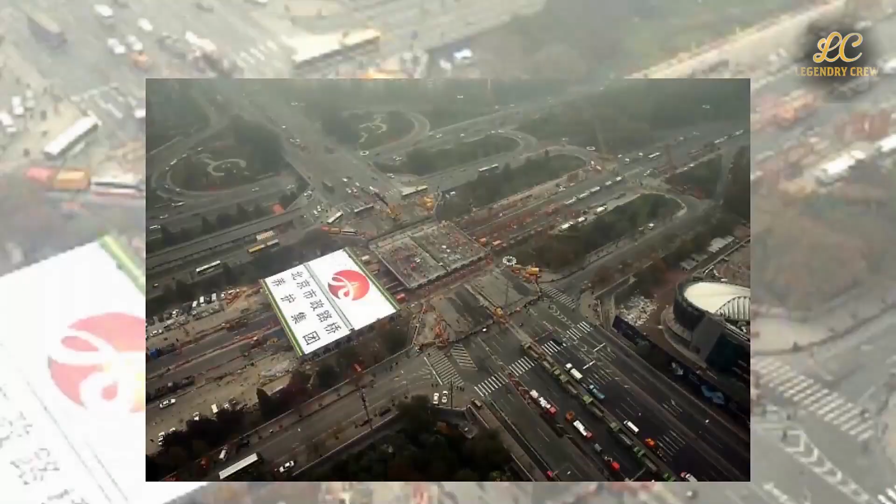In Beijing, a highway bridge that carried more than 200,000 vehicles a day was replaced in roughly 43 hours. That number is not a metaphor. Traffic was diverted. The old structure was cut into 27 prefabricated segments, the heaviest weighing about 139 tons, and a new bridge weighing roughly 1,300 tons was rolled into place on multi-axle transporters and aligned to millimeter tolerances. By Monday morning, commuters were back on schedule.

The viral takeaway is speed. The harder question is why that speed is possible, and what it actually proves.

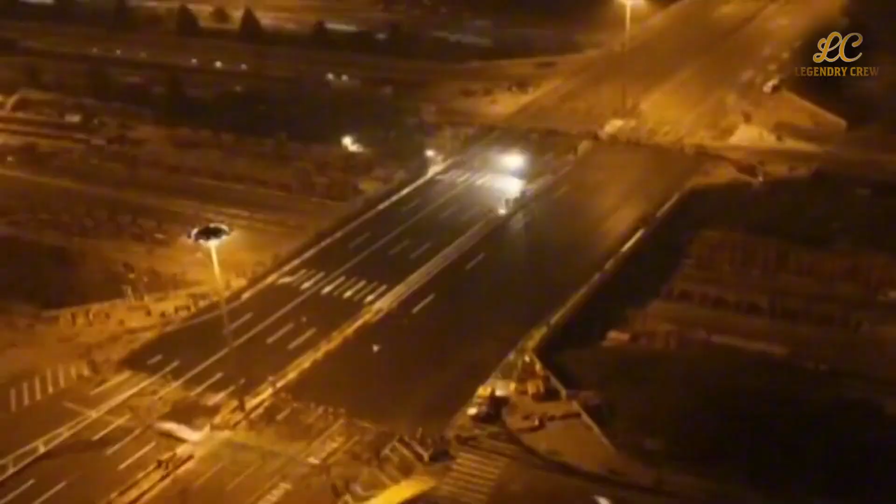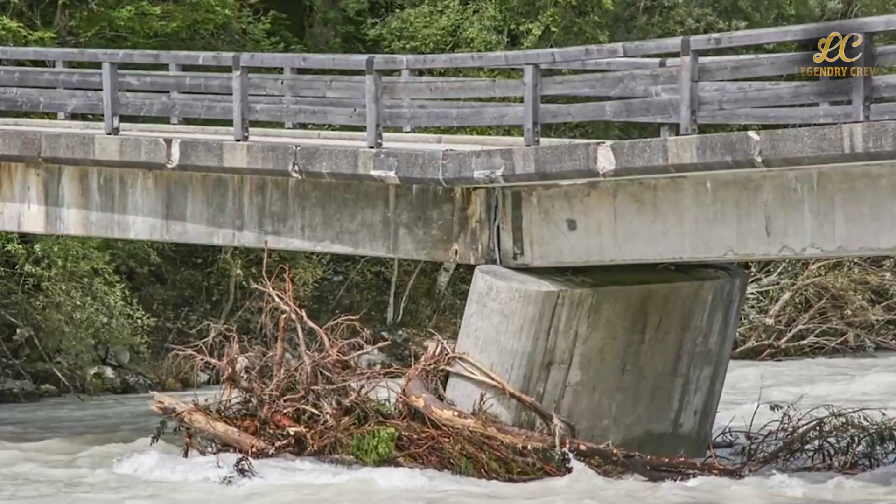Start with the obvious explanation that gets skipped in most videos: China spends far more on infrastructure than the United States, and it has done so for years. Independent estimates put annual infrastructure investment at roughly 6 to 8% of gross domestic product through much of the last decade. In the United States, public infrastructure spending has hovered closer to 2%. When you fund more projects, you also fund the factories, the crews, the transporters, and the learning curve that turns one impressive replacement into a repeatable playbook. Speed is not magic. It is capitalization.

There is also the matter of standards. The SanYuan Bridge replacement was not a bespoke art project. It was modular. Prefabrication meant the work happened off-site, under controlled conditions, while traffic kept moving. When the window opened, crews executed a choreography they had rehearsed before. The equipment was owned or reserved in advance. The tolerances were known, and the authority to shut lanes and move freight did not require years of public hearings.

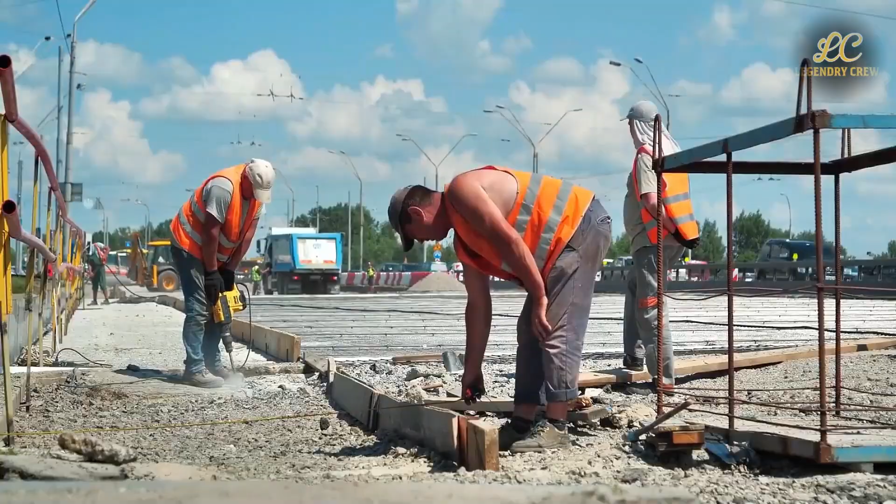None of that diminishes the engineering. It explains it. Contrast that with the American reality: the latest National Infrastructure Scorecard raised the United States to a solid C, an improvement from the previous C-. That progress is real. Federal funding increased, and some backlogs are easing. But the structural problem remains.

Major transportation projects routinely spend a decade or more in permitting, litigation, and procurement before a shovel touches dirt. By the time construction begins, costs have inflated and designs are compromised to fit what is left of the budget. American engineers are not slower. American projects are older before they are born.

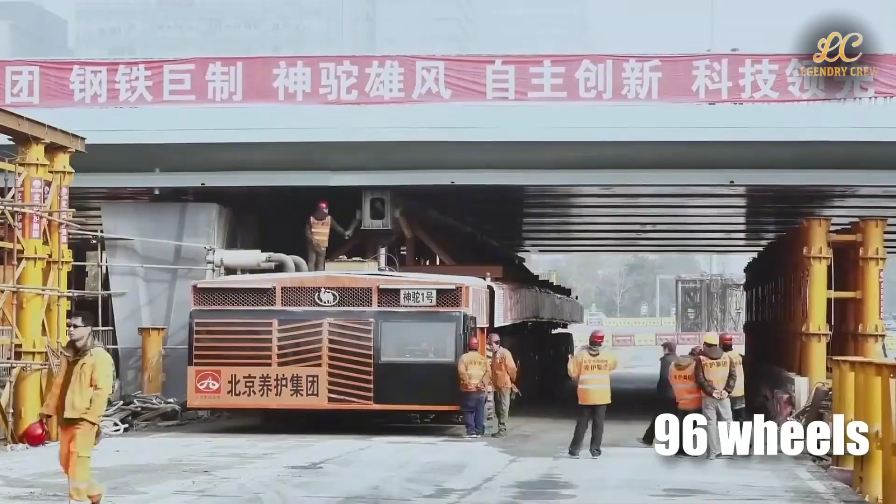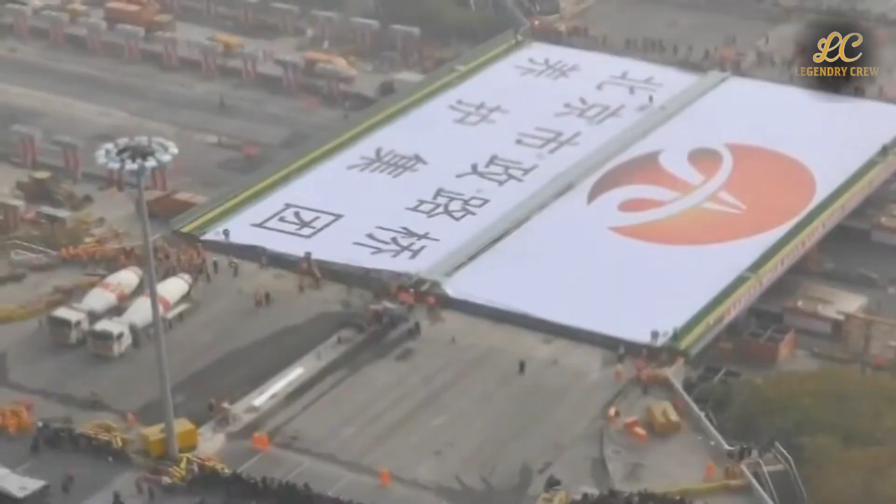This is where the China comparison gets abused. The Beijing Bridge example is presented as proof of superior talent. It is better understood as proof of a system that prioritizes execution over process when leaders decide a project matters. That trade-off has benefits. It also has costs. Fewer veto points mean fewer delays, but they also mean fewer chances for local communities to object, fewer opportunities to change a design midstream, and fewer legal brakes if something goes wrong.

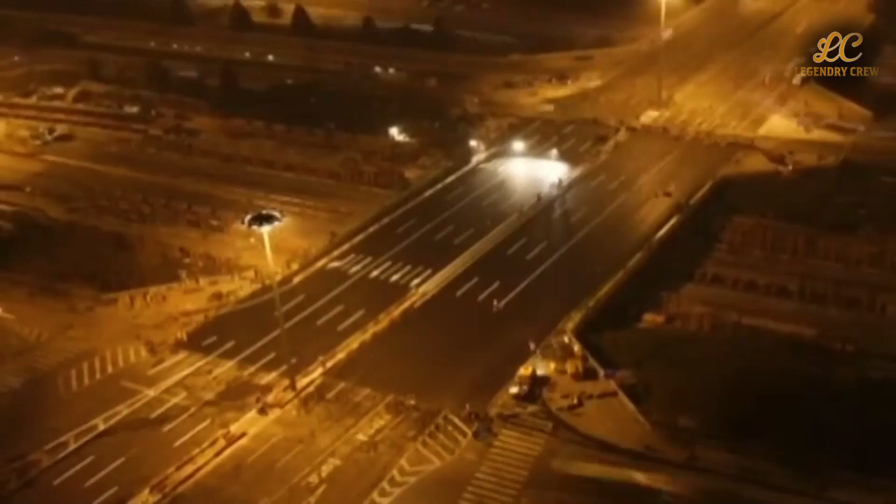Speed is a choice. There is another factor that rarely gets airtime: maintenance versus replacement. The SanYuan Bridge was replaced quickly because replacement had been planned and funded. In the United States, agencies are often forced to stretch aging assets far beyond their design life because maintenance budgets get raided to plug other gaps. When a bridge finally must be replaced, it is an emergency layered on top of deferred upkeep.

China's model front-loads capital to avoid that trap. America's model postpones pain until it becomes unavoidable. Then we act surprised by the bill.

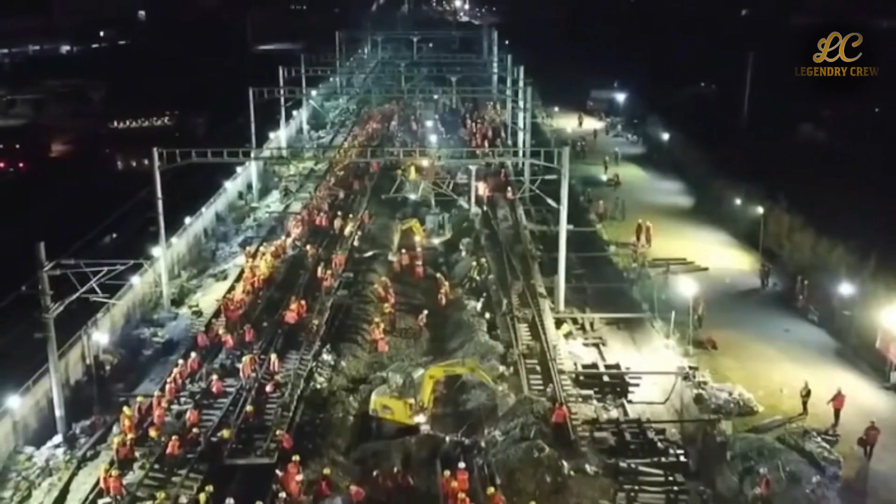The viral clips also omit the cost context. Rapid replacements require fleets of specialized transporters, heavy lift cranes, and a supply chain that can deliver massive components on command. Those assets are expensive. They make sense when they are used frequently across many projects. They make less sense in a system where large replacements are rare because funding arrives in bursts. China amortizes speed across volume. The United States buys speed one project at a time, if at all.

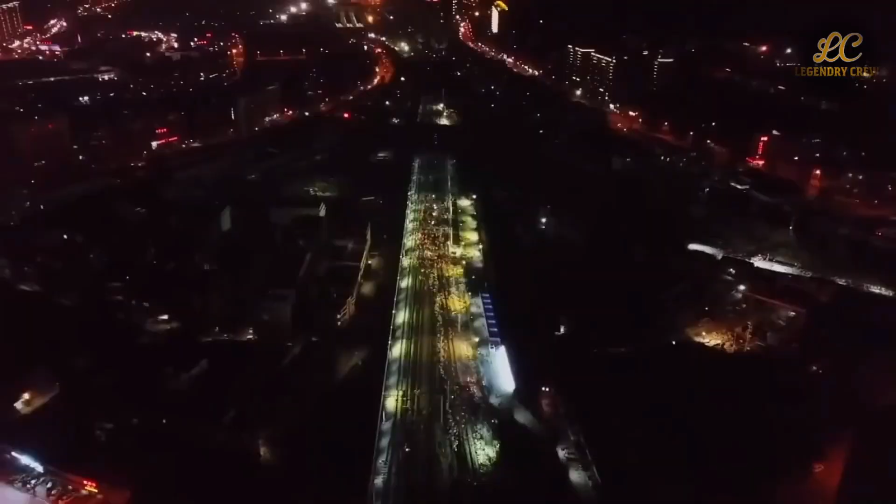None of this should be read as an argument that America should copy China wholesale. The United States values transparency, environmental review, and local consent for good reasons. Those values slow projects down, and they also reduce risk in ways that are hard to quantify in a highlight reel. But it is fair to say that the pendulum has swung too far toward paralysis.

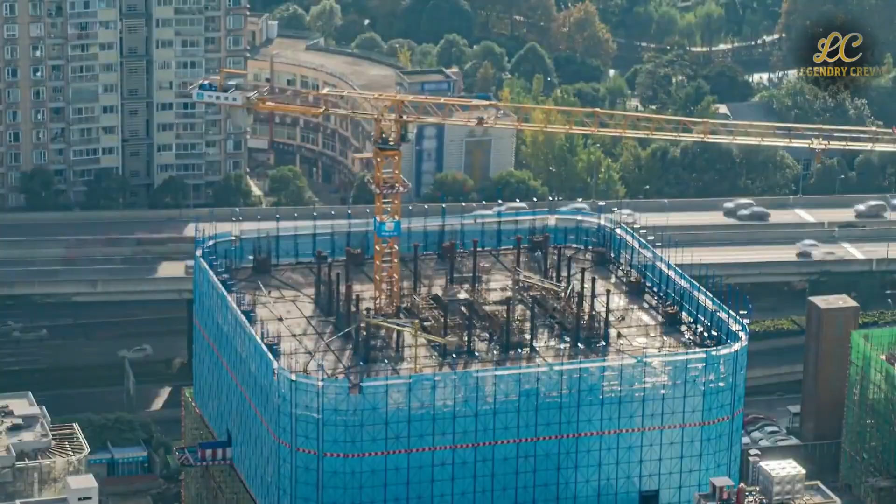When a bridge replacement that could be executed in a weekend takes years of paperwork, the problem is not engineering. It is governance. The Beijing Bridge replacement also reveals something uncomfortable for American audiences: when China decides a project is essential, it aligns money, authority, and logistics behind that decision. In the United States, those elements are fragmented across agencies and jurisdictions. Each fragment has a veto.

The result is not safety, it is drift. We end up paying more to get less, and we congratulate ourselves for the delay. So what shocked American engineers watching that 43-hour replacement was not the math. It was the permission. Permission to standardize, permission to prefabricate, permission to close roads decisively, and permission to treat construction as an industrial process rather than a bespoke negotiation.

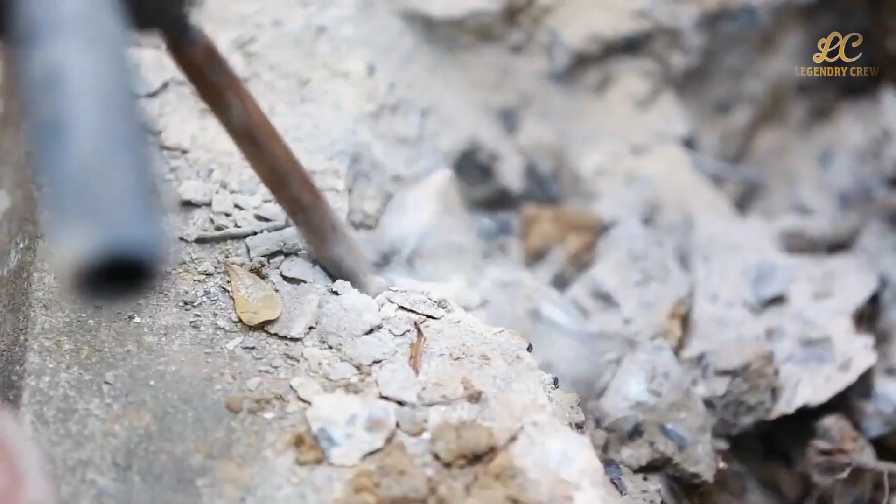That permission does not come free. It is purchased with political trade-offs that Americans have historically rejected. The question is not whether we can build faster. It is whether we are willing to decide when speed matters, and to pay for it honestly when it does.

The second viral example usually comes packaged as a slogan: a railway project completed in 9 hours. What actually happened in Longyan, Fujian province, was more precise and more revealing. Crews replaced and upgraded a critical section of track and signaling near an active station during a tightly controlled overnight window. Trains were halted, teams moved in by the thousands, prefabricated components were dropped into place, systems were tested, and service resumed before morning. The headline says, 9 hours.

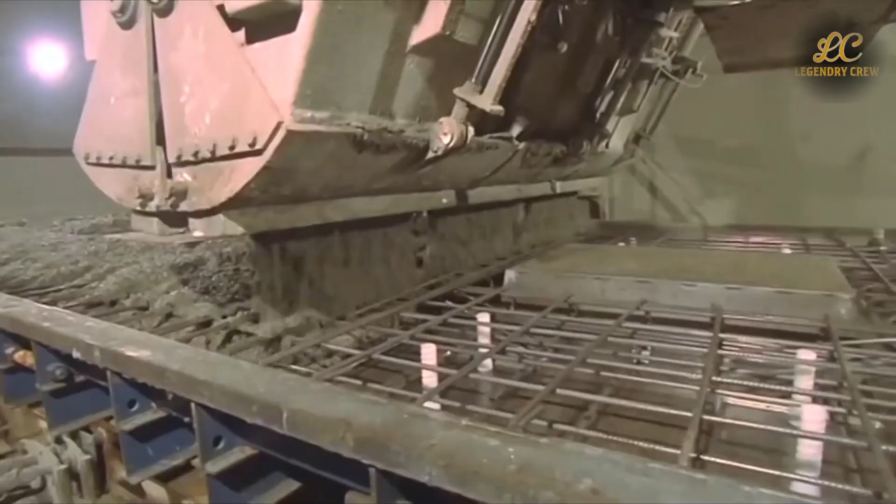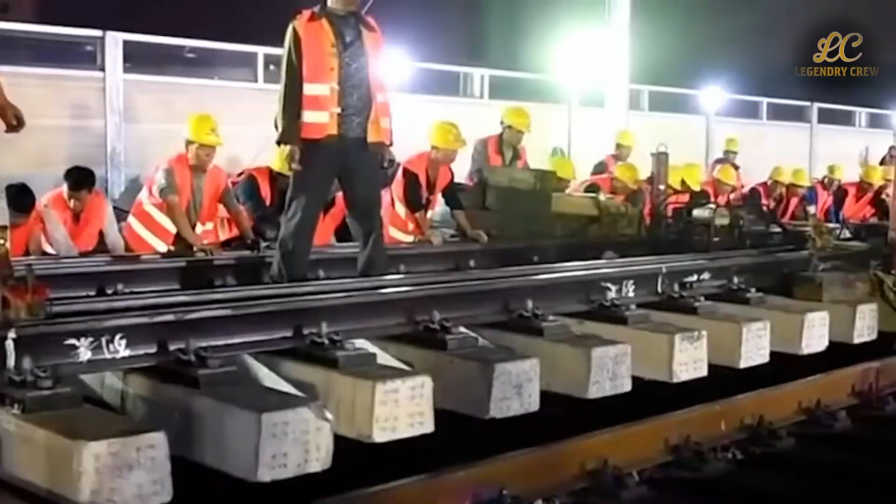The lesson is everything that happened before those 9 hours ever began. By the end of 2023, China's high-speed rail network had reached roughly 45,000 kilometers in operation, more than the rest of the world combined. That scale matters because it creates repetition. Stations, tracks, switches, and signaling systems are standardized. Crews train on the same configurations again and again. Suppliers build to known specs. When an upgrade window opens, there is no debate about which bolt fits which plate. The work looks miraculous, only if you ignore the years spent removing uncertainty.

Funding explains the rest. In 2023 alone, fixed asset investment in China's railway sector reached approximately 764.5 billion yuan. That money did not just buy concrete and steel. It bought inventory buffers, spare components, and standby labor. It bought the ability to mobilize 1,500 workers for a single night without scrambling for contracts. In American terms, it bought optionality. When something needs to be done fast, the pieces are already paid for.

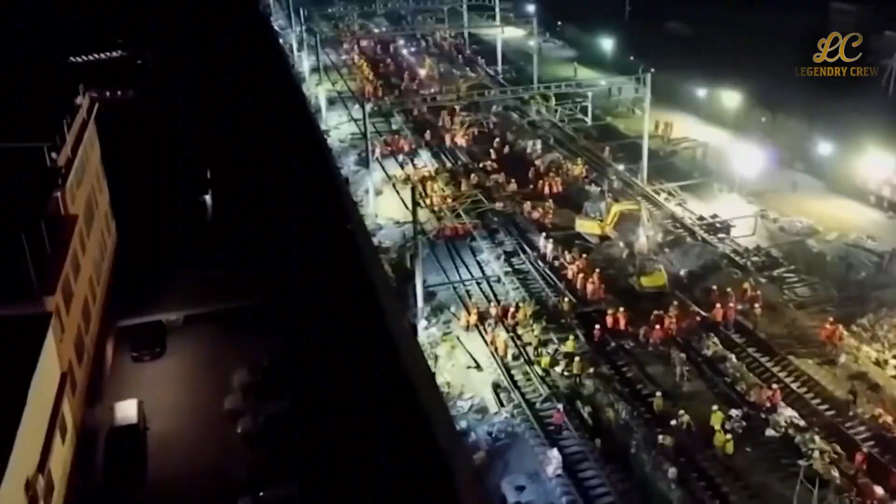The United States runs the opposite model. Rail upgrades compete for funding with highways, transit, ports, and airports. Assets are customized by region, vendor, and era. Even when money is approved, procurement rules stretch timelines and discourage stockpiling. As a result, work that could be compressed into a narrow window expands to fill months or years. Crews do what they can during limited shutdowns, then leave and return later. The inefficiency is not in the labor. It is in the stop-start rhythm, imposed by budgeting and oversight.

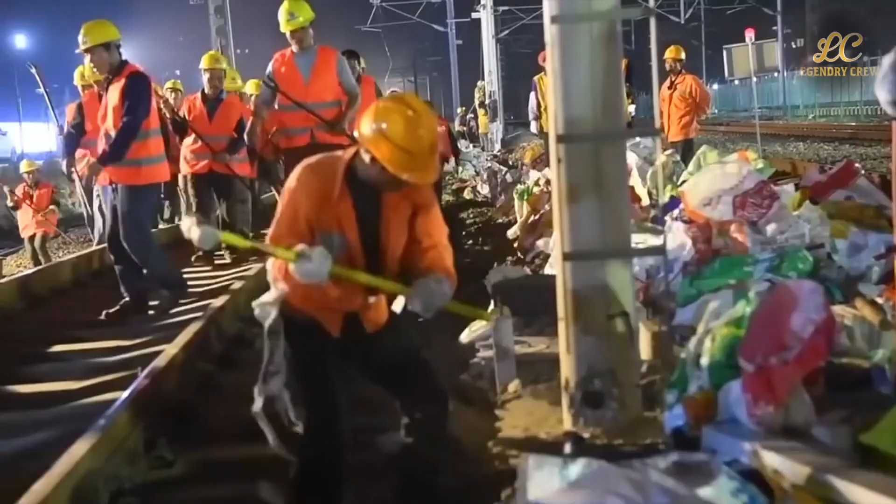Supporters of the Chinese model point to travel time savings as proof of success. Routes that once took 7 hours now take 90 minutes. That is real value for passengers. Critics point out that not every line earns its keep. Both can be true. Research on infrastructure returns shows that early high-speed corridors delivered strong economic benefits, while later expansions into less dense regions produced diminishing returns. Speed, in other words, scales faster than profitability.

The Longyan project also highlights a cultural difference in how disruption is managed. In China, overnight shutdowns are treated as a civic inconvenience that serves a collective goal. In the United States, even short service interruptions can trigger political backlash and legal challenges. Agencies respond by minimizing closures, which stretches projects over longer periods and inflates costs. The irony is that the attempt to avoid disruption often creates more of it, just spread thinly over time.

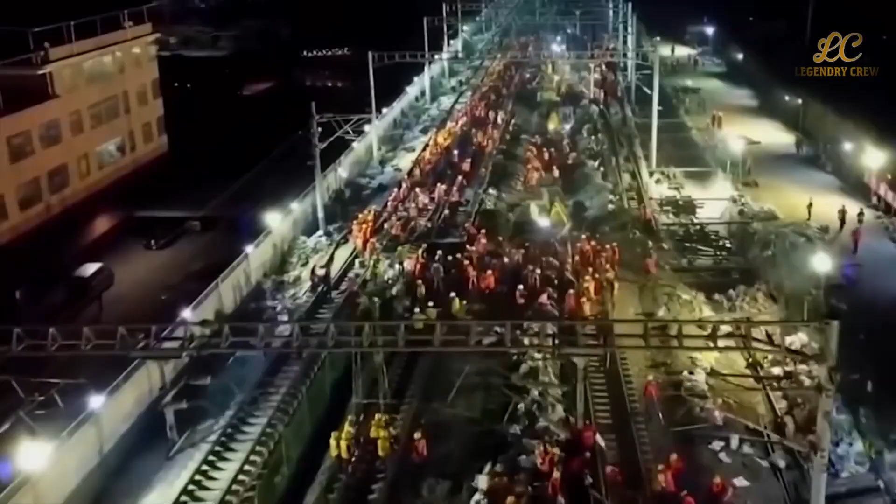There is a tendency in American media to frame these stories as a referendum on national competence. That misses the point. The 9-hour upgrade was not about genius engineers working miracles. It was about a system designed to concentrate risk and effort into short, intense bursts. That system accepts that something might go wrong, and it prepares redundancies accordingly. The American system distributes risk by slowing everything down. Neither approach is morally superior. They reflect different social contracts.

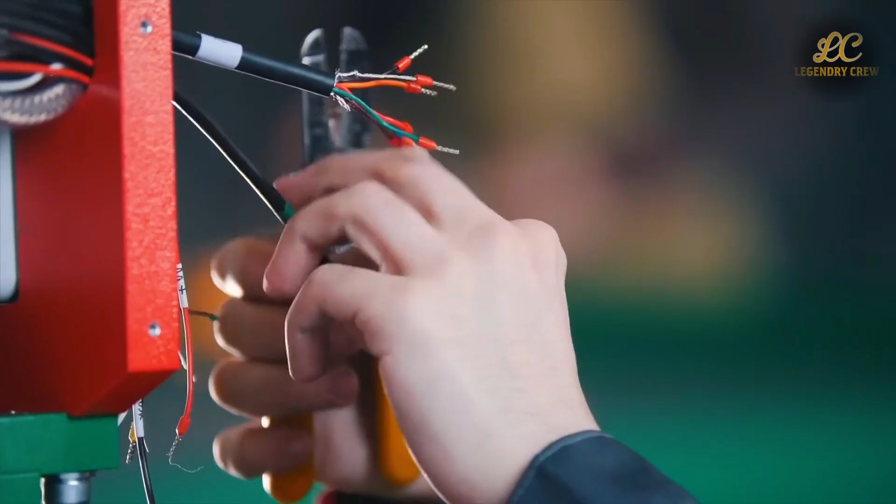For an American audience, the uncomfortable takeaway is this: speed is not an outcome you order at the end of a project. It is a feature you design into the entire pipeline. China's rail program shows what happens when design standards, funding cycles, labor organization, and political authority are aligned around execution. The United States could replicate parts of that alignment without abandoning its values, but doing so would require admitting that delay is not free. It has a cost, and that cost is paid in missed opportunities long before the first train ever leaves the station.

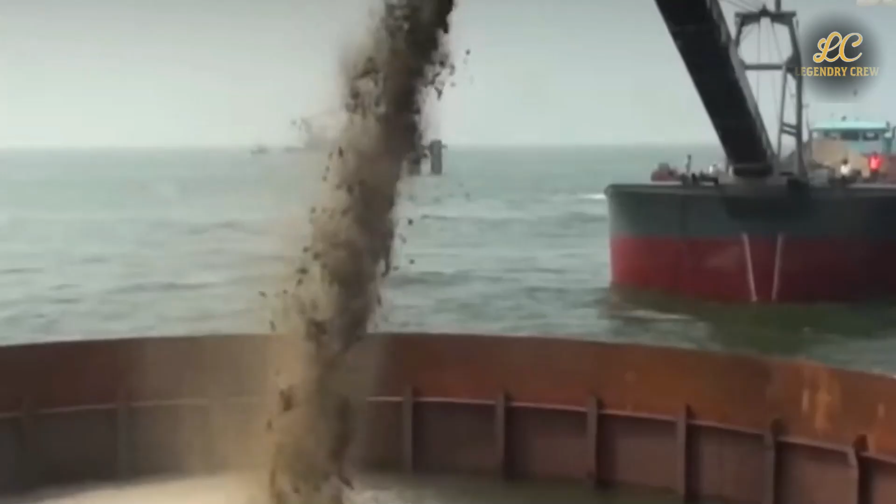The Hong Kong-Zhuhai-Macau link is often introduced with a single number, 55 kilometers, followed by a dramatic pause. Bridge, tunnel, artificial islands, typhoons, shipping lanes, environmental constraints. It sounds like a checklist designed to impress. The reality is more interesting when you strip away the hype and look at what the project actually required to function at all. This was never just a bridge. The Pearl River Delta is one of the busiest maritime corridors on Earth.

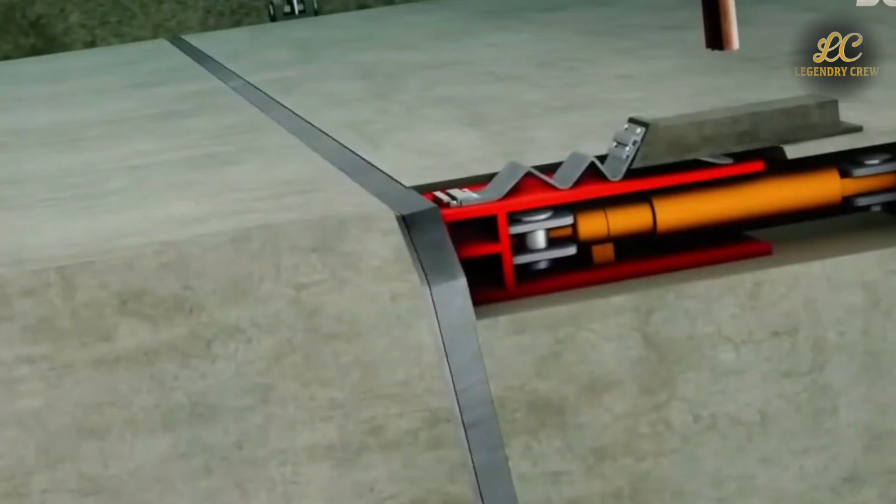Closing it was not an option. That constraint forced engineers to combine long viaducts with an immersed tube tunnel of roughly 6 kilometers, connected by man-made islands. Each tunnel section was cast off-site, floated into position, sunk with ballast, and aligned underwater.

That process is not fast by accident. It is slow by design until it suddenly looks fast at the very end, when the last pieces lock together. This is where many viral videos lose credibility. They toss around extreme figures for segment weights or installation times without clarifying units or context. In serious reporting, those numbers matter.

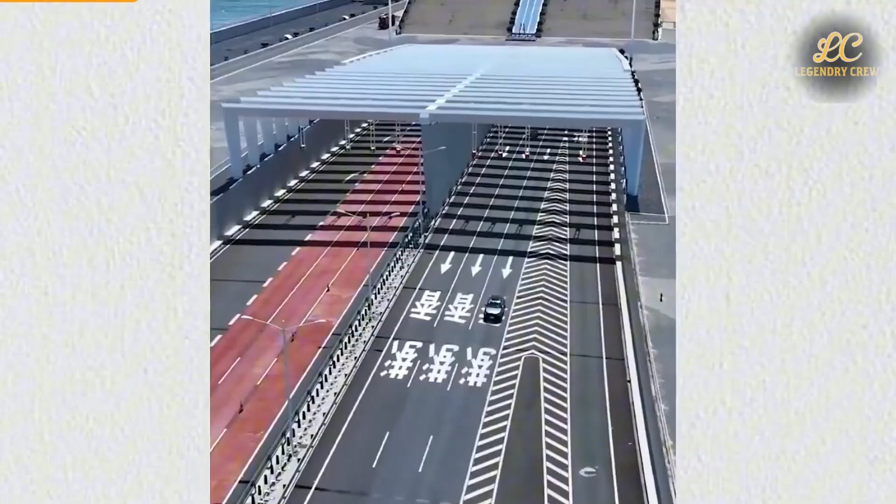What can be verified is the method: standardization of segments, controlled casting yards, precise marine positioning, and a construction schedule built around weather windows and shipping traffic. The achievement is not that China defied physics, it is that the project accepted physics early and organized everything else around it.

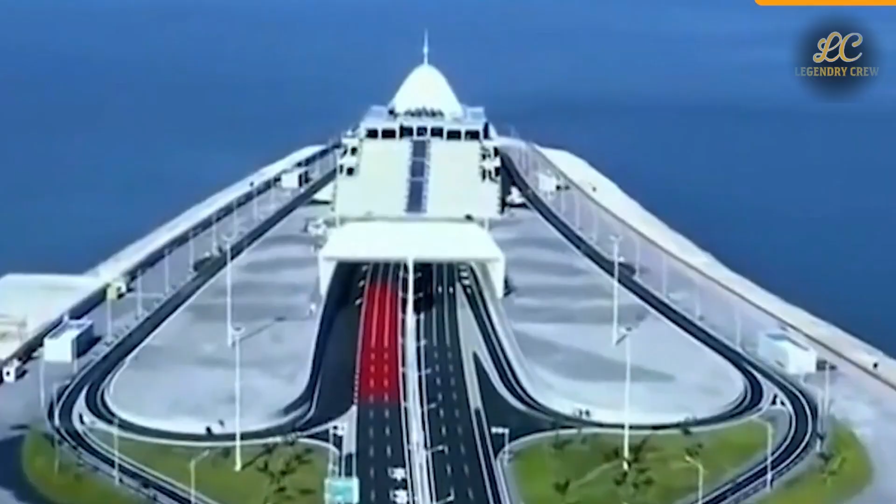Cost tells the other half of the story. The link carried a price tag measured in tens of billions of dollars. That figure is rarely emphasized in short videos, but it matters for any honest comparison with the United States. American megaprojects face ballooning costs because delays are expensive. The Hong Kong Zhuhai Macau project faced enormous upfront costs because redundancy and control were built in from day one. You pay either way. The difference is when and how the bill arrives.

Environmental trade-offs also tend to get compressed into a single reassuring sentence. The project included mitigation measures for local marine life, including the endangered Chinese white dolphin. Those measures were real, monitored, and controversial. They also illustrate a broader pattern: in China, environmental mitigation is often treated as a parallel track that must keep pace with construction, not a gate that construction must pass through before it begins. That choice accelerates timelines, but it also shifts risk to monitoring and enforcement after the fact.

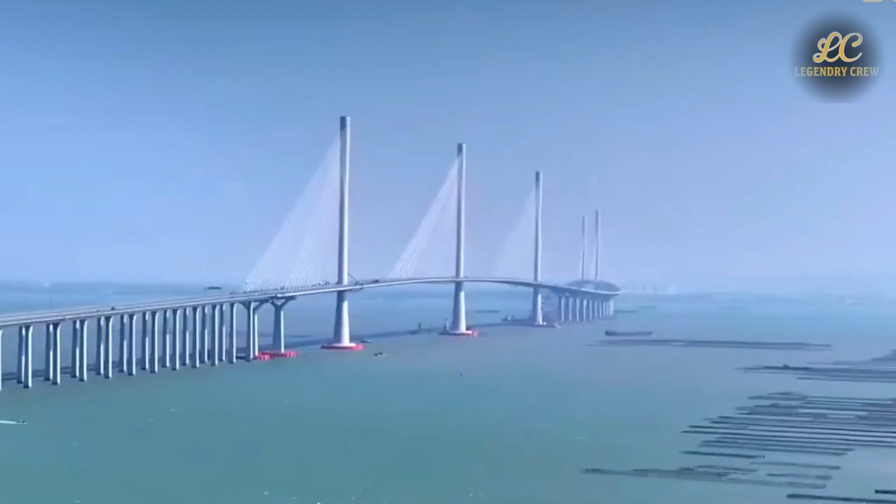For an American audience, the lesson is not that the United States should bulldoze objections and move on. It is that clarity matters. The Pearl River project had a single overriding objective: connect 3 economic hubs directly. Once that objective was set, design and authority followed.

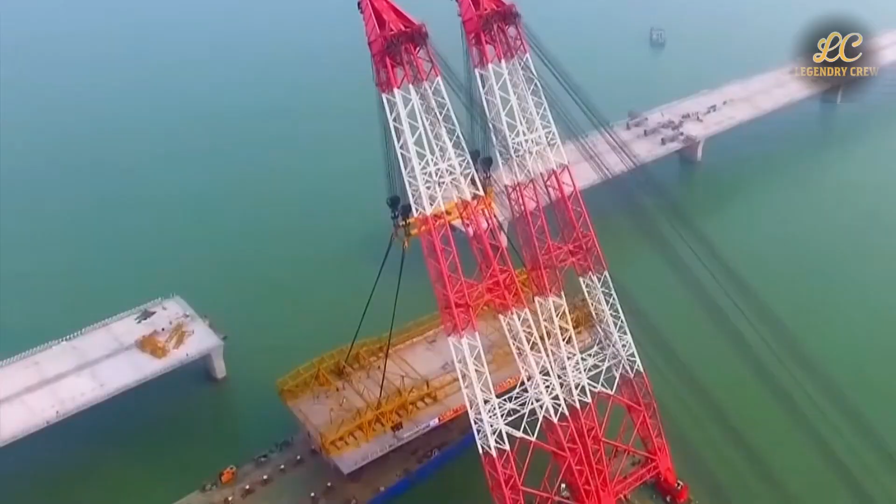In the United States, objectives often compete with each other inside the same project. Mobility, local impact, cost containment, climate goals, and legal defensibility all pull in different directions. The result is compromise layered on compromise, and timelines that drift.

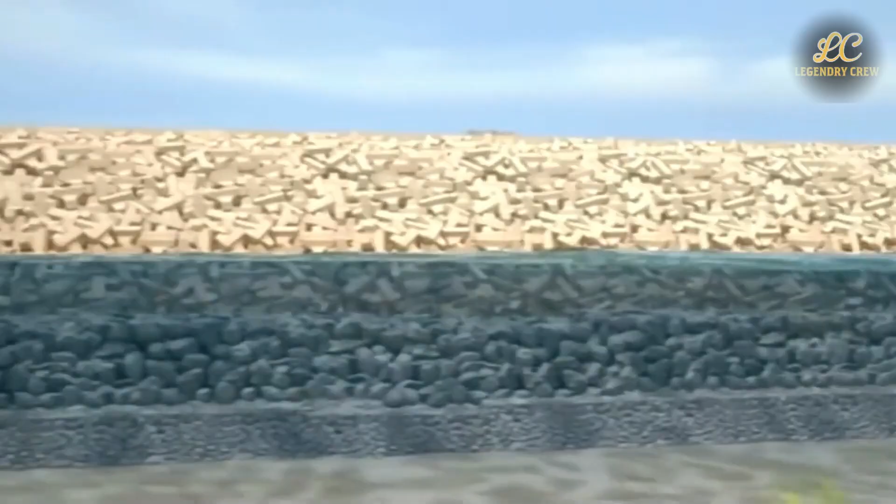The bridge tunnel system also reveals why comparisons based on speed alone are misleading. This was a multi-year effort that culminated in a visible finish line. When the final connections were made, it looked sudden. It was not. Years of preparatory work were simply invisible to the camera. The same is true of many American projects, except the invisible phase is dominated by paperwork rather than fabrication.

What shocked outside observers was not that China built something large, it was that it delivered a complex, hybrid solution without redesigning it halfway through. That stability is rare in systems where political leadership changes frequently and projects are reopened for review.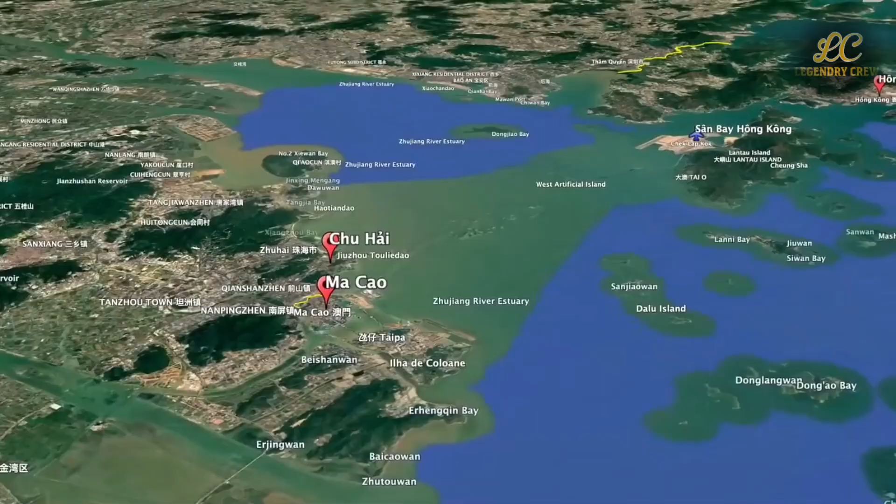The Hong Kong Zhuhai Macau link shows what happens when scope is locked early and defended aggressively. It also shows the cost of that discipline, in money, in flexibility, and in public debate. If you want a sober takeaway, it is this: mega projects succeed when uncertainty is pushed to the front and paid for up front. China does this with capital and authority. The United States does it with time and process. Neither method eliminates risk. They just choose different currencies to spend.

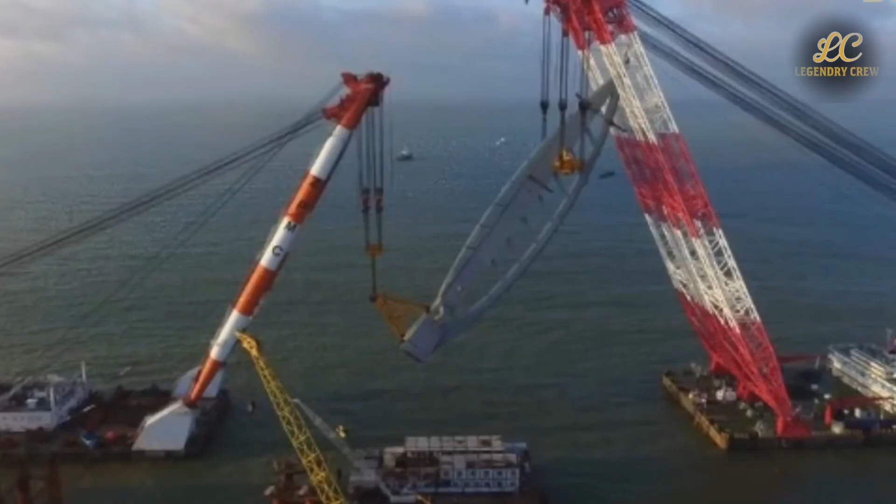When the script shifts from transport to energy, the tone usually turns reverent. Baihetan and the 3 Gorges are introduced as monuments, turbines the size of buildings, output measured in tens of thousands of megawatts, and annual generation tallied in tens of billions of kilowatt hours. Those numbers are real, but they only tell half the story. The other half is what projects like these do to a power system, a budget, and a society over time.

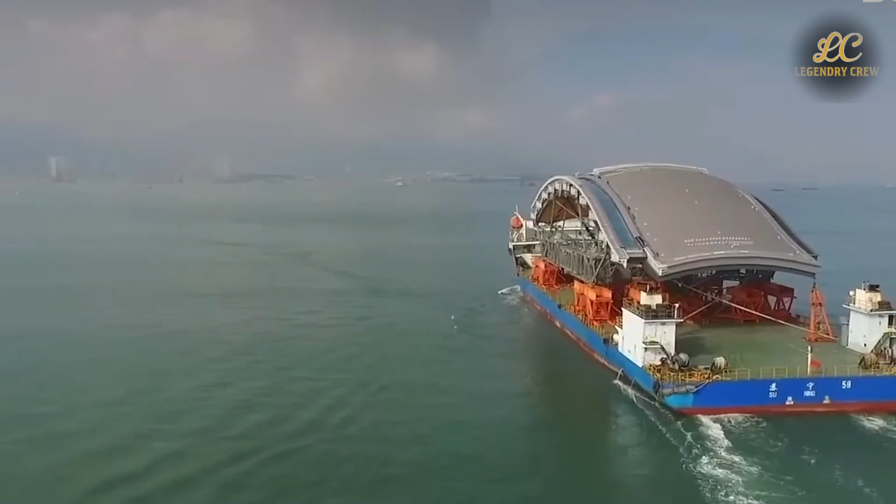Baihetan's installed capacity sits at roughly 16,000 megawatts, delivered by 16 turbines, rated at 1,000 megawatts each. Annual generation is often cited at more than 62 billion kilowatt hours. On paper, that is clean energy at industrial scale. It smooths peak demand, reduces reliance on coal during certain seasons, and gives grid operators a powerful balancing tool. In a country with enormous regional disparities in supply and demand, that matters.

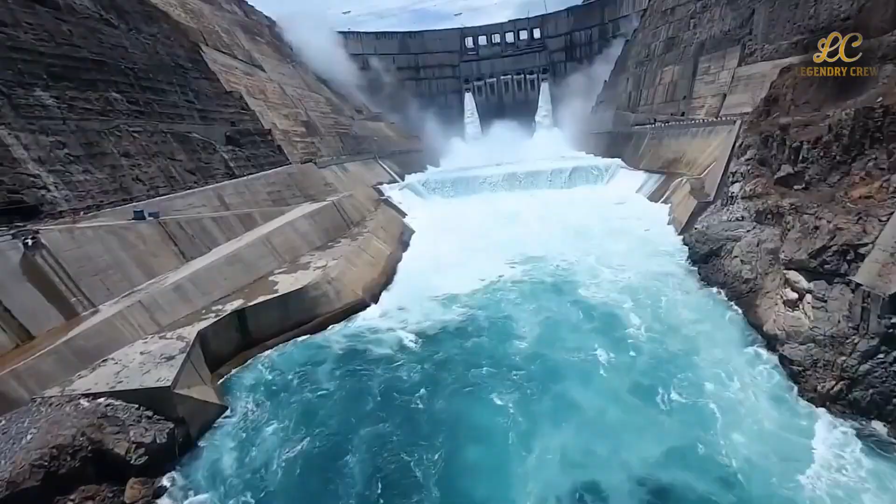The same logic applies to the 3 Gorges, which for years has been the world's largest hydropower station by capacity. In 2020, it set a production record of more than 111 billion kilowatt hours. That output stabilized downstream grids and enabled long-distance transmission to coastal manufacturing centers. From a systems perspective, these dams are not just generators, they are anchors around which transmission planning, industrial zoning, and flood control policies are built. But scale cuts both ways.

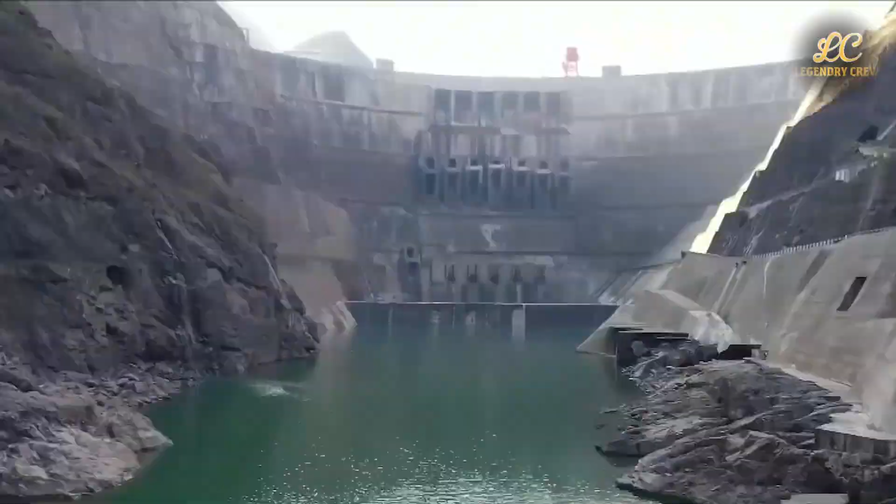Hydropower projects concentrate risk as effectively as they concentrate output. Construction required relocating more than one million people, reshaping ecosystems, and committing to decades of maintenance on structures that cannot be easily modified once complete. Environmental impacts do not end when the turbines start spinning. Sedimentation, biodiversity loss, and seismic concerns persist, and mitigation costs accrue quietly year after year.

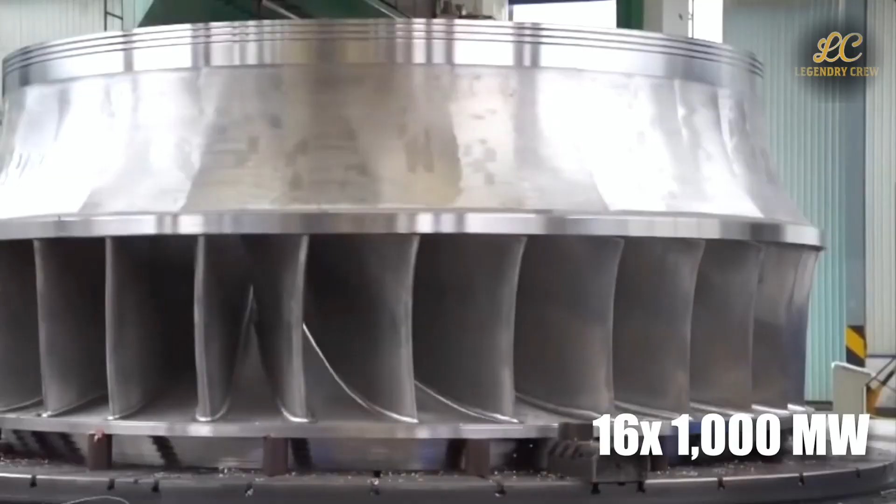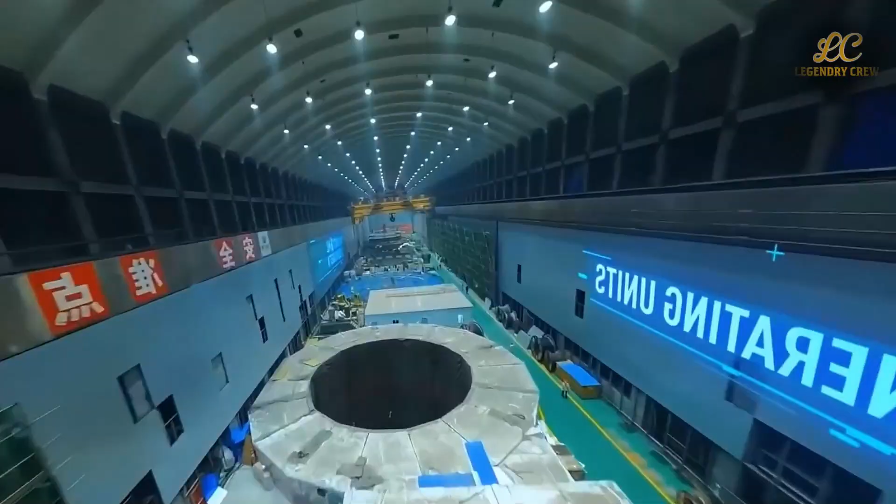There is also the fiscal dimension that rarely appears in viral explainers. Megadams are capital-intensive upfront, and their financing is often intertwined with local government balance sheets. International financial institutions have repeatedly warned that infrastructure-related liabilities at the local level in China are large and opaque, depending on how they are counted. Hydropower can generate steady revenue, but it does not immunize a region against debt stress if broader economic conditions shift.

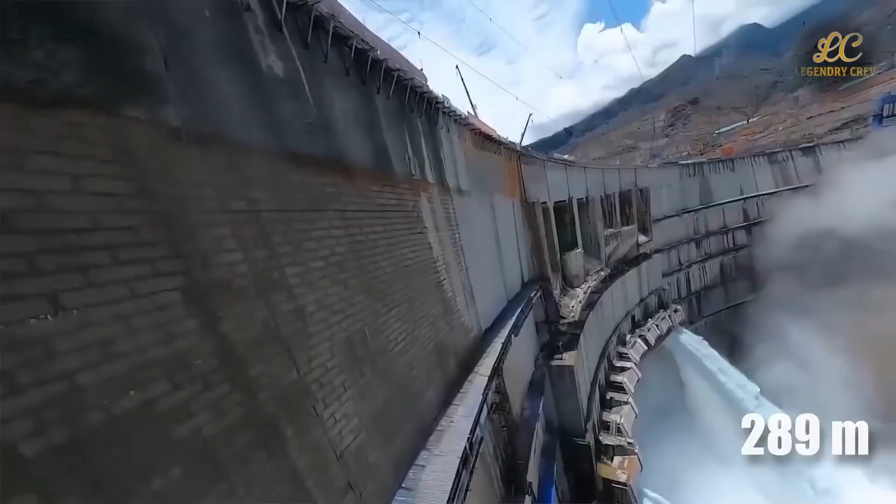For American viewers, the contrast is striking. The United States has hydropower assets of its own, many built decades ago, but new large-scale dams are politically and environmentally untenable. Energy strategy has shifted toward incremental additions: wind, solar, storage, and grid upgrades. That approach spreads risk and avoids mass displacement, but it also lacks the drama and the immediate punch of a single massive project. Progress looks slower because it is distributed.

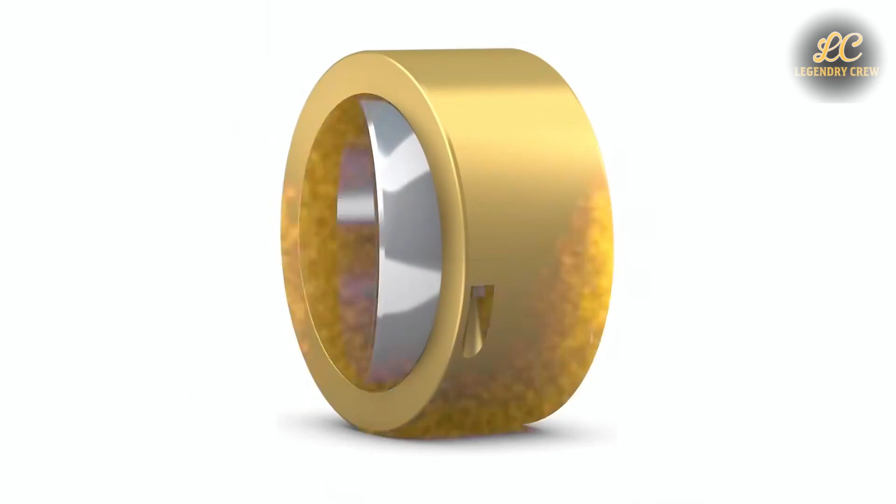This difference feeds the perception gap that the original video exploits. China appears decisive and bold, while the United States appears hesitant. In reality, both systems are optimizing for different constraints. China uses scale to force rapid transitions in capacity. The United States uses diversification to manage uncertainty and public consent. One produces landmarks, the other produces portfolios.

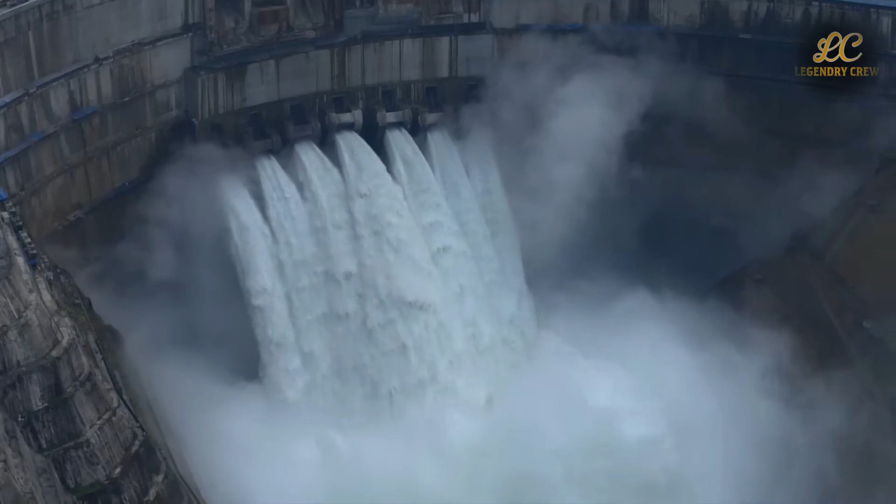The uncomfortable truth is that neither approach is free. Large dams lock in decisions for generations. Distributed energy locks in complexity and coordination costs. When commentators marvel at Baihetan's numbers, they are really reacting to clarity of choice. Someone decided that this project would happen, accepted the consequences, and moved on. In the United States, those consequences are debated exhaustively before a decision is made, and often again afterward.

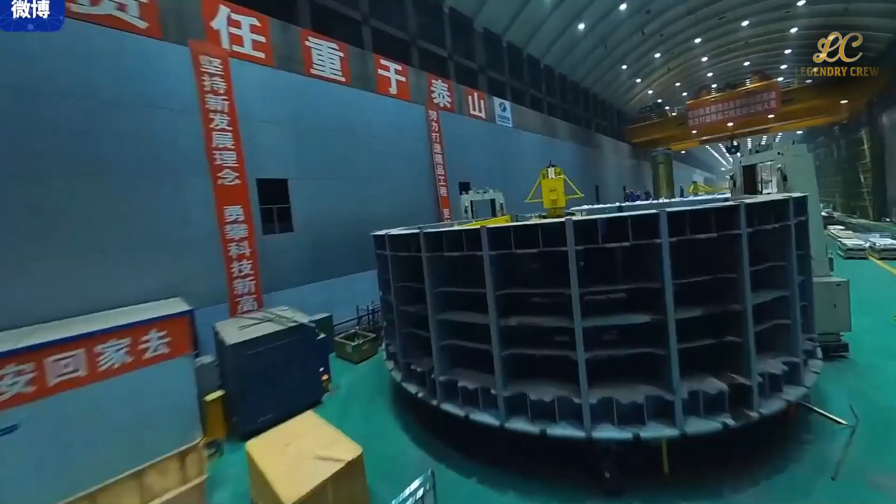So the energy megaprojects do not prove that one country is smarter than the other. They prove that priorities differ. China is willing to pay environmental and social costs upfront to secure scale quickly. The United States is willing to accept slower gains to preserve flexibility and accountability. Engineers understand this trade-off instinctively. The shock comes from seeing it executed so visibly, and from recognizing that the price of hesitation is not zero. It is just paid in smaller, quieter installments over time.

The Huoshenshan Hospital is often treated as the ultimate mic drop. Ten days, one thousand beds, tens of thousands of square meters, live-streamed construction. For many American viewers, it looked like proof that China could simply will infrastructure into existence.

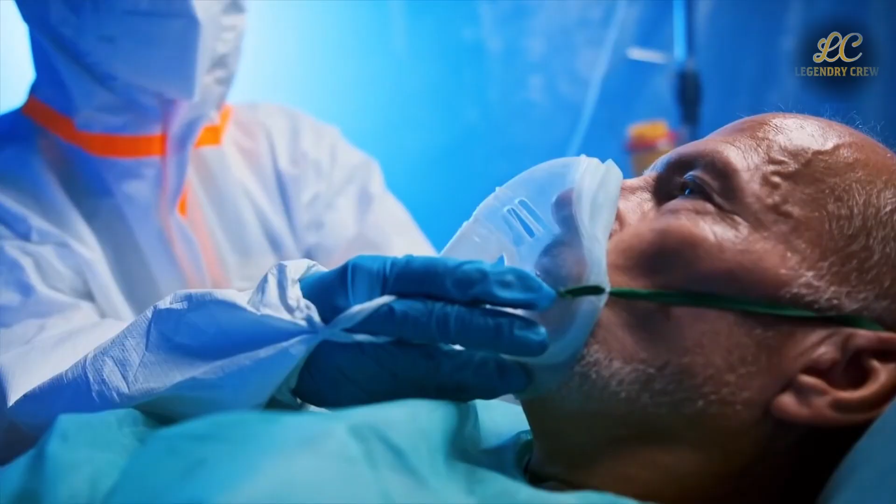The reality is more instructive, and far less mystical. Huoshenshan was not designed from scratch under pressure. It relied on a prefabricated modular system that already existed. Panels, utility cores, ventilation units, and isolation layouts were standardized in advance. Digital models were shared across contractors in real time.

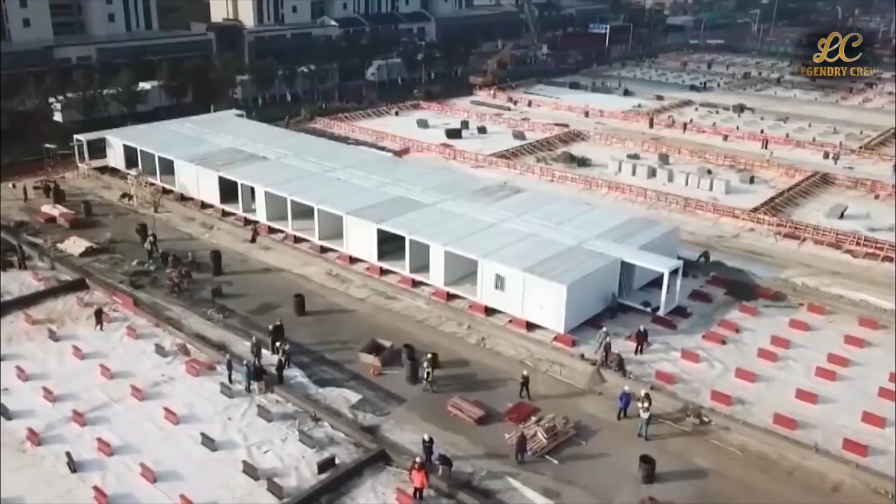When construction began, more than 7,000 workers were organized into tightly defined tasks, operating around the clock. Trucks moved on priority routes. Materials arrived in sequence, not in bulk. The site functioned less like a traditional construction project and more like a logistics operation.

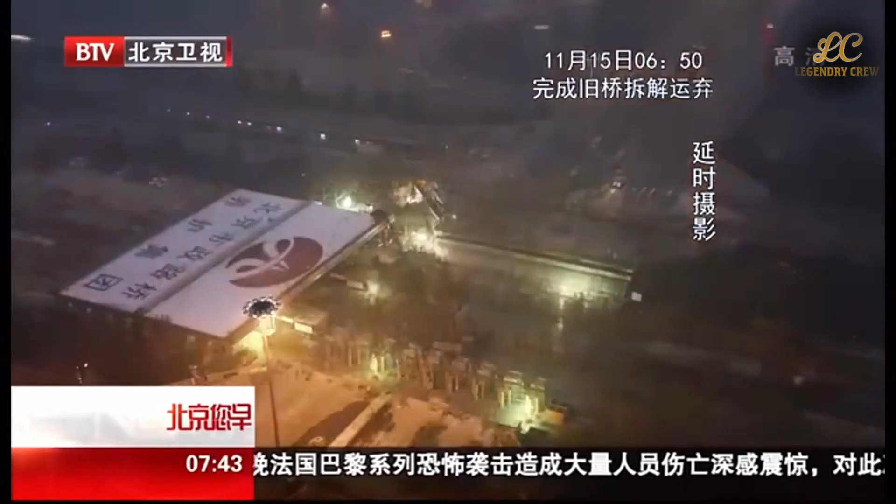This distinction matters. Speed came from preparation, not improvisation. The ten-day timeline worked because quality expectations were narrowly defined. The hospital was built to handle a specific emergency, not to serve as a permanent, multi-decade facility. That choice reduced design debates and inspection layers. It also accepted trade-offs in durability and flexibility that would be unacceptable for a conventional hospital. The project was fast because it was purpose-built for crisis conditions.

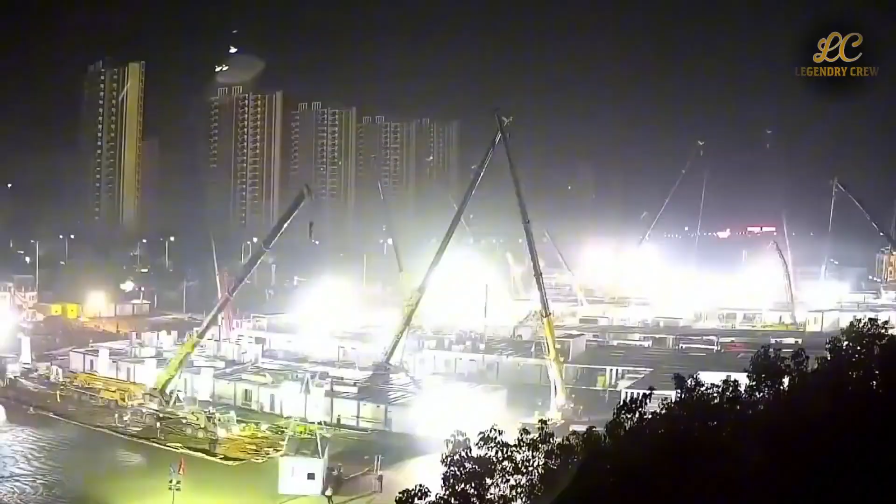Compare that with how emergency construction works in the United States. Field hospitals can be deployed quickly, and during recent crises, they were. But permanent structures face a web of licensing, liability, and reimbursement rules that do not disappear in an emergency. Even when political will exists, institutional inertia remains. Agencies must coordinate across federal, state, and local lines. Private operators must agree on who pays and who is responsible if something fails. The result is caution layered on urgency.

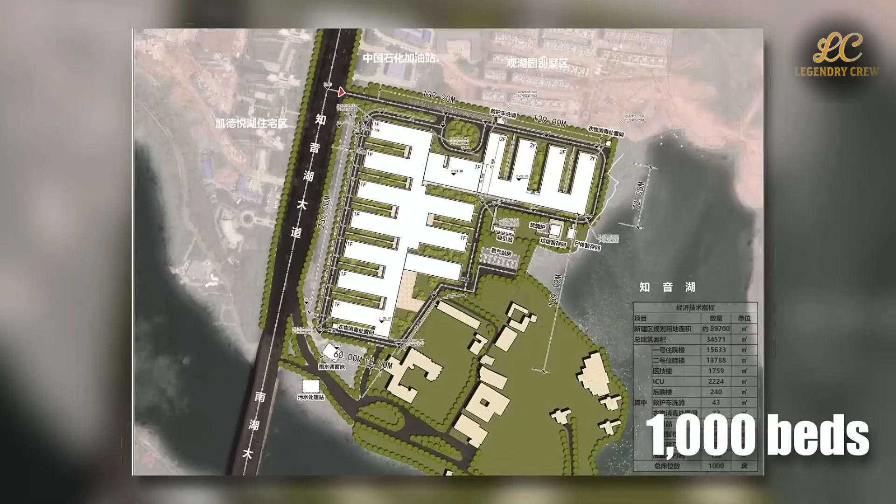There is also a cultural difference in how visibility is used. Huoshenshan was live-streamed around the clock. That transparency was performative, but it was also disciplinary.

When millions are watching, delays are harder to hide. Mistakes are corrected immediately. In the United States, public works are rarely exposed in that way. Oversight happens through reports and hearings long after the fact. Accountability is slower, and so is correction.

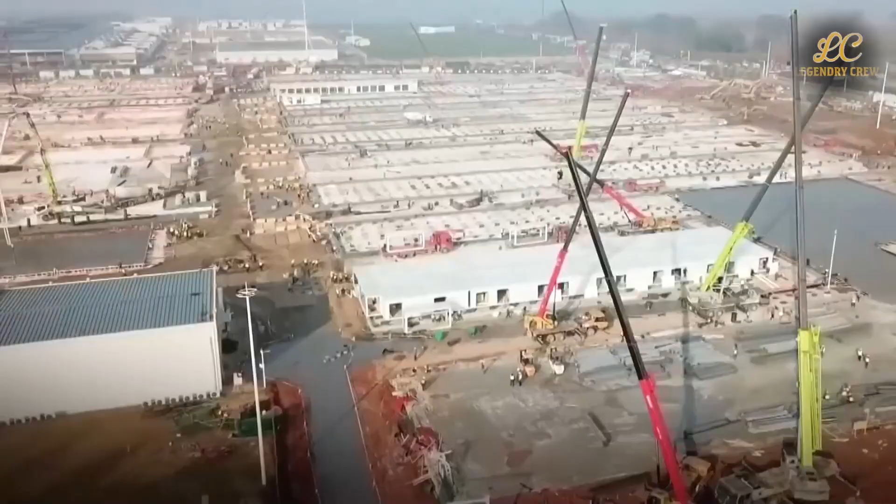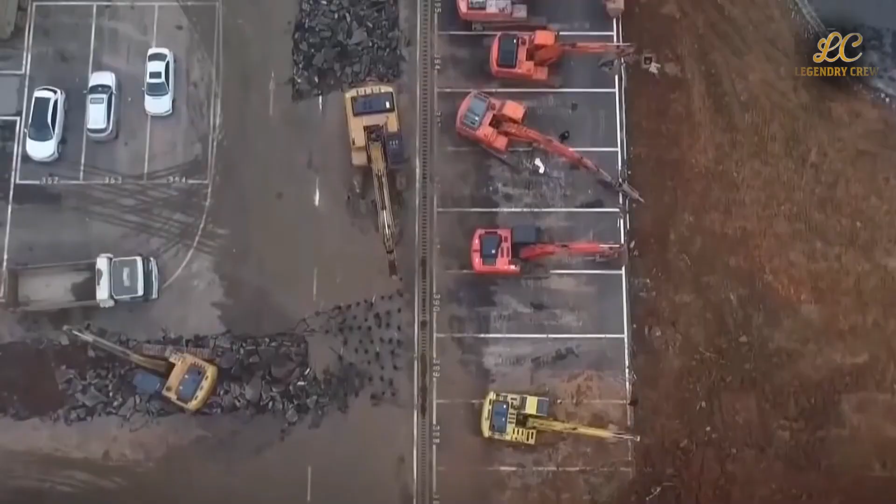Critics rightly point out that emergency speed is not a sustainable model for everyday infrastructure. That is true. What Huoshenshan demonstrates is not how to build all hospitals, but how to mobilize a construction ecosystem when normal constraints are temporarily suspended. It shows what happens when permitting, procurement, and coordination are collapsed into a single command structure. The cost is that individual objections and refinements are sidelined. In a crisis, that trade-off is often accepted. Outside a crisis, it becomes controversial.

For an American audience, the sharper lesson is about readiness. China could build Huoshenshan in 10 days because it had already invested in modular systems, digital coordination, and surge capacity. The United States tends to invest after a failure exposes a gap. That pattern produces resilience eventually, but it rarely produces speed on the first attempt. When speed is demanded, the system has to be bent, not activated.

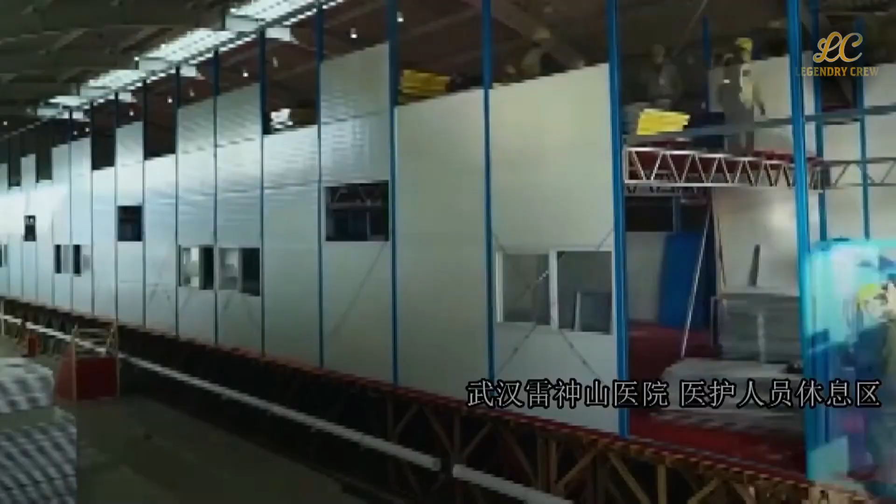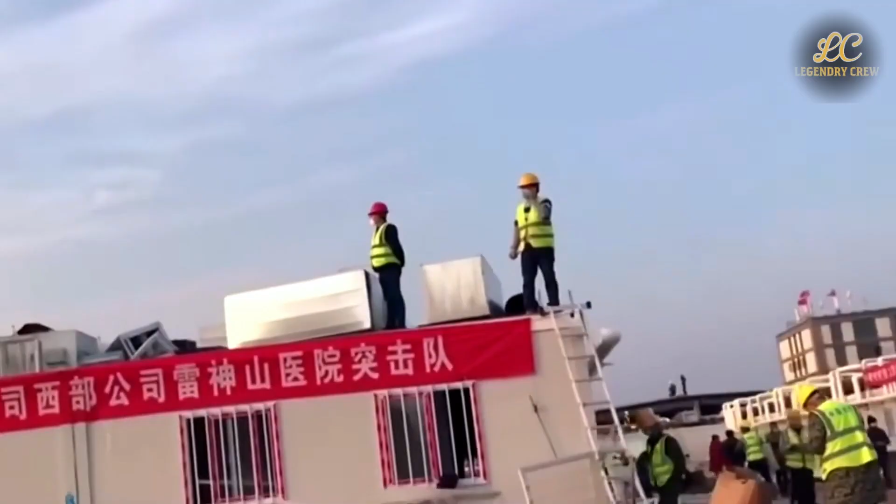There is also a quieter economic point. Rapid emergency builds do not come cheap, even if the bill is not itemized publicly. Overtime labor, priority logistics, and redundant supply chains cost money. Those costs are easier to absorb in a system where the state can reallocate resources quickly and where losses can be socialized. In the United States, such costs trigger audits, lawsuits, and political backlash. The incentives push decision-makers toward delay rather than acceleration.

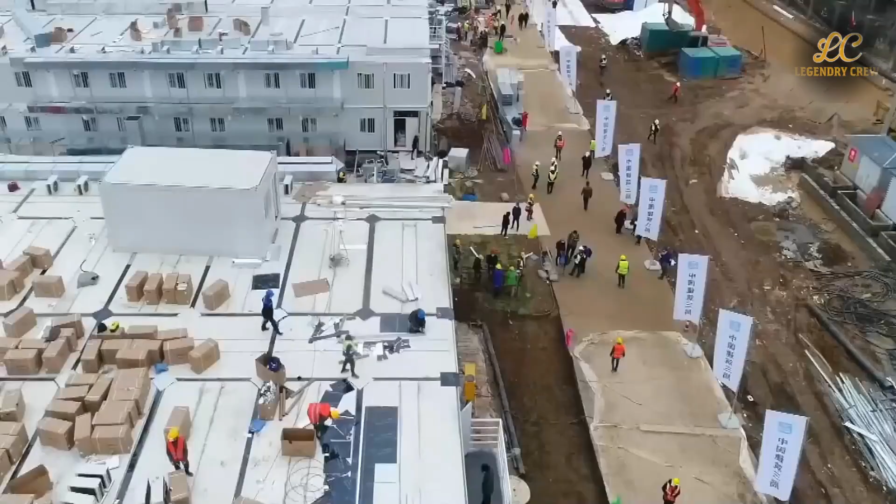Huoshenshan, then, is best understood as a demonstration, not a template. It demonstrates how far modular construction and centralized coordination can be pushed under extraordinary conditions. It also demonstrates the limits of comparison. The United States does not lack the technical ability to do something similar. What it lacks is a standing agreement on when it is acceptable to bypass normal processes, who bears the risk, and how the costs are justified after the emergency passes.

That is why the hospital shocks American engineers. It compresses into 10 days what in the United States would be spread across months of planning, debate, and negotiation. The compression feels like genius. It is really a political decision executed competently. Whether that decision should be normal or exceptional is a question of values, not capability.

When the story moves beyond China's borders, the tone shifts again. Projects like the Merowe Dam in Sudan are presented as proof that China can export its construction prowess anywhere on the planet. A massive structure on the Nile, new turbines, extended transmission lines stretching roughly 1,500 kilometers. The implication is that Chinese firms do abroad what others hesitate to attempt at home. The reality is more complex and more revealing about how these deals actually work.

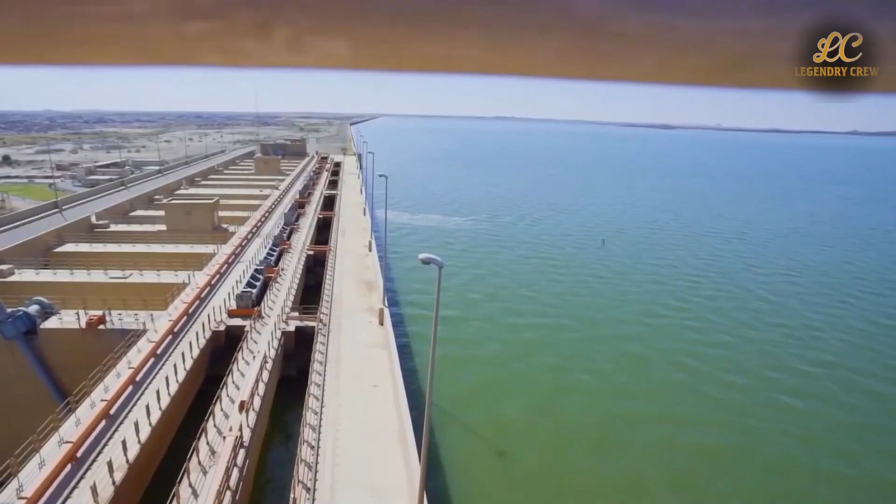Merowe followed a familiar pattern. Chinese state-owned enterprises delivered engineering, procurement, and construction as a single package. Financing was bundled alongside the build, often through state-backed lenders. Equipment, contractors, and timelines were integrated under one command. For host countries, this model is attractive. It reduces upfront uncertainty and promises visible results. For China, it exports industrial capacity and keeps domestic firms busy when growth slows at home.

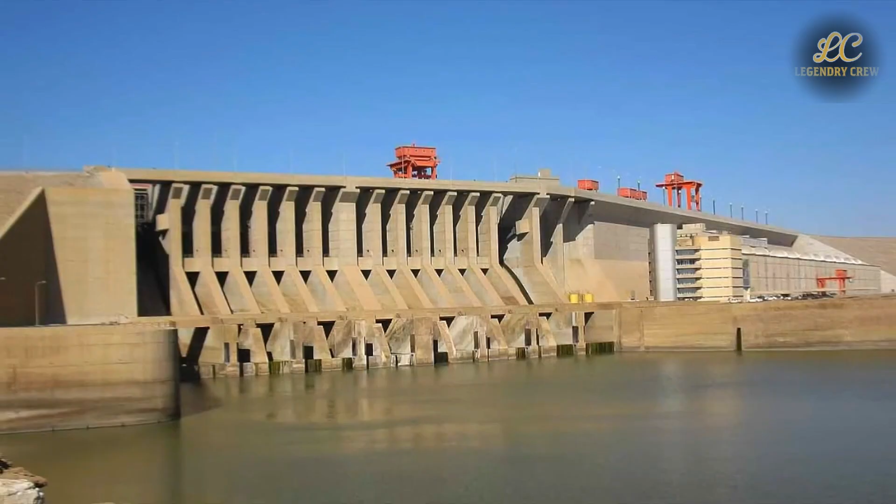The numbers are substantial. The dam added more than 1,000 megawatts of generating capacity and required extensive upgrades to the surrounding power grid. That meant not just concrete and turbines, but long-distance transmission infrastructure to carry electricity to population centers. On paper, this is development. Lights turn on, industries expand, and governments can point to a tangible achievement.

But financing is where the shine dulls. International financial institutions have repeatedly warned that infrastructure loans tied to mega projects can strain public finances, especially when revenue projections fall short. In China's case, concerns extend inward as well. Estimates suggest that local government-related debt linked to infrastructure may exceed 50% of national gross domestic product, depending on how off-balance sheet obligations are counted. Exporting the model does not make those risks disappear. It extends them.

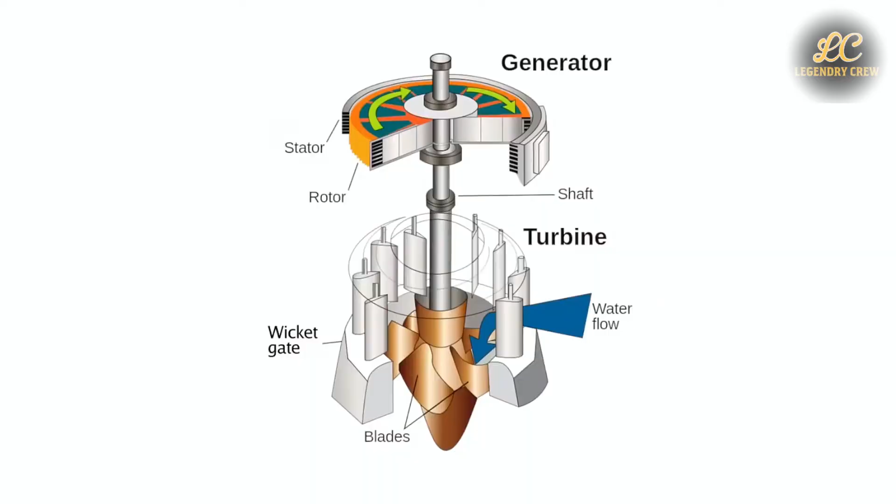For American audiences, this is a crucial counterweight to the original narrative. The shock is not that China builds big things overseas. It is that those builds are inseparable from credit. Chinese firms are competitive not just because they can pour concrete quickly, but because they arrive with financing in hand. Western contractors often lose bids not on engineering, but on the balance sheet. Speed is paired with solvency, at least in the short term.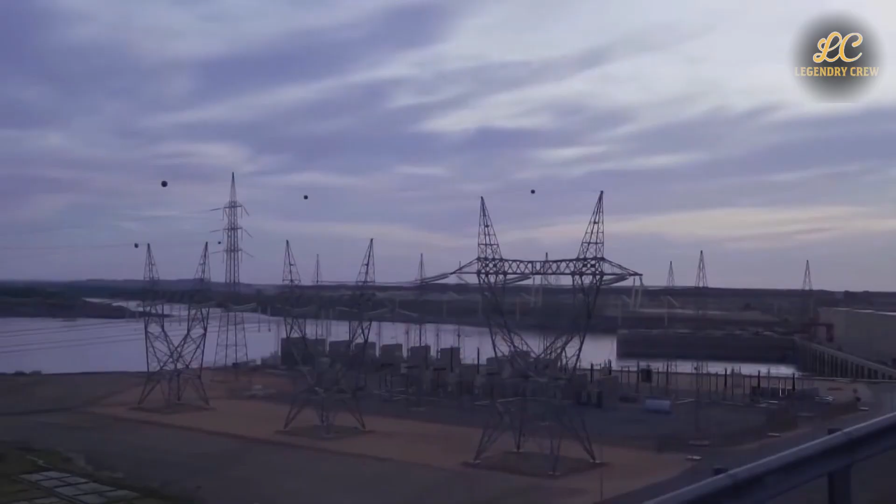There is also a geopolitical layer that videos tend to glide past. Infrastructure projects create long-term relationships. Power plants, dams, and grids require maintenance, spare parts, and technical expertise for decades. That dependence can translate into influence.

Whether intentional or not, host countries weigh that influence against immediate needs. The calculation is rarely ideological, it is practical. This is where comparisons with the United States become uncomfortable.

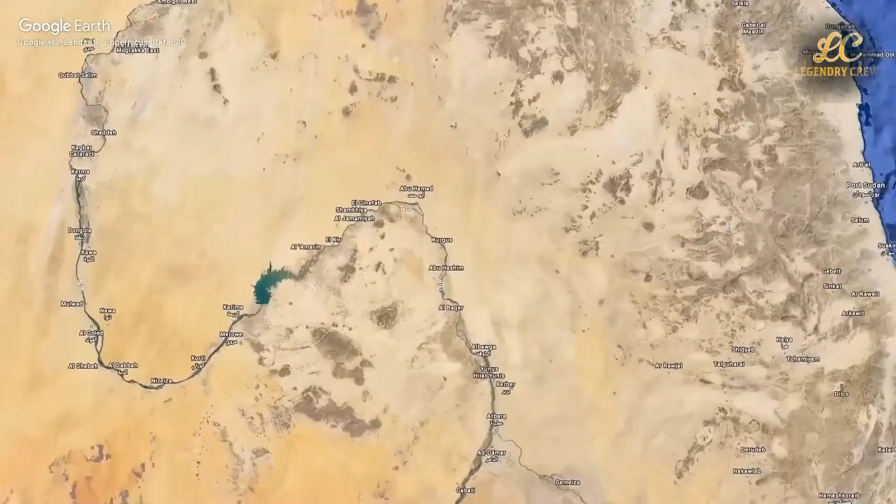American firms excel at high-end engineering and project management, but they operate in a fragmented financing environment. Export credit exists, but it is cautious, slow, and often tied to political conditions. As a result, American involvement skews toward advisory roles rather than turnkey builds. The outcome looks like hesitation, even when it is the product of a different risk calculus.

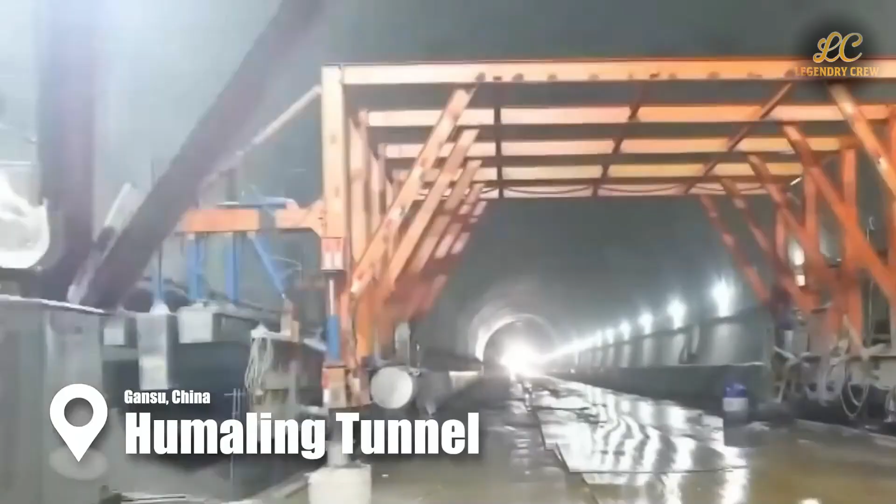Merowe illustrates the central trade-off of China's outward push. By bundling construction and finance, projects move quickly from concept to reality. By doing so, they also concentrate financial risk and political exposure. When growth is strong, that model looks unstoppable. When growth slows, the same commitments become constraints.

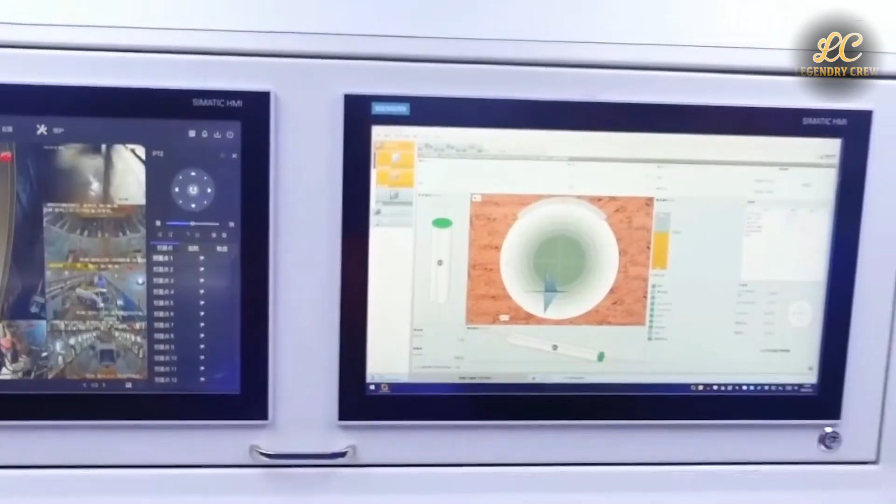So the foreign megaprojects do not simply demonstrate engineering dominance. They demonstrate a willingness to treat infrastructure as an export industry, backed by national balance sheets. That strategy has delivered results across Africa, Asia, and the Middle East. It has also generated unease among creditors and partners who worry about long-term sustainability. For American engineers, watching from the sidelines, the shock is not technical, it is structural.

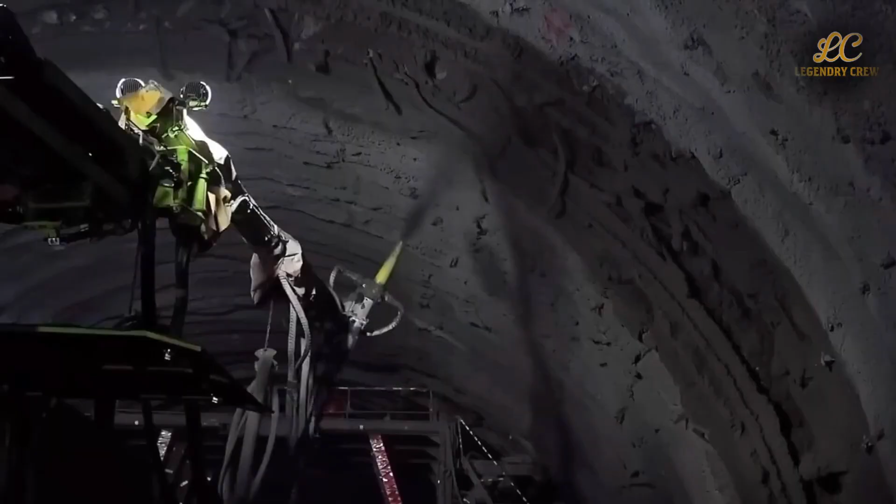The question is not whether the United States can build dams or power lines abroad. It is whether it is willing to package engineering, capital, and political risk into a single offer, and to live with the consequences when projects underperform. China has answered that question with concrete. The rest of the world is still debating the terms.

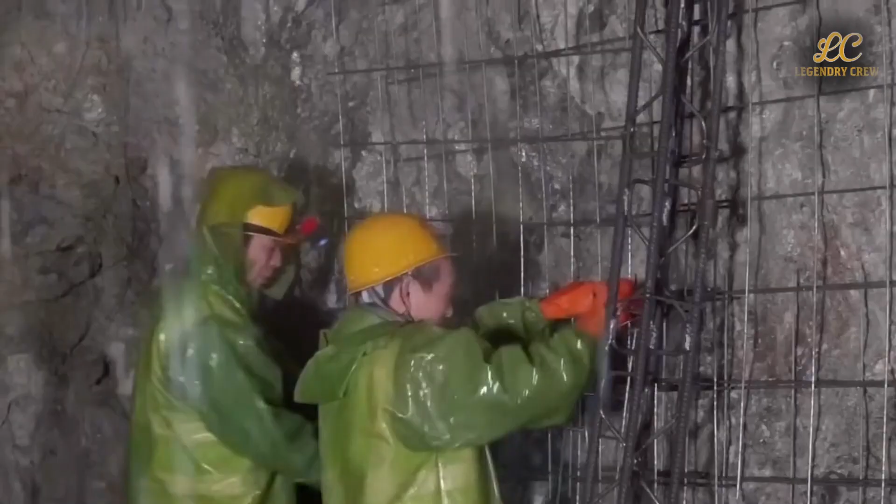In reality, it is the most honest case study in the entire lineup. The Humaling Tunnel was not slow because of incompetence. It was slow because the ground itself refused to cooperate. Loess is unstable, highly porous, and prone to collapse when saturated. Every meter advanced risked failure.

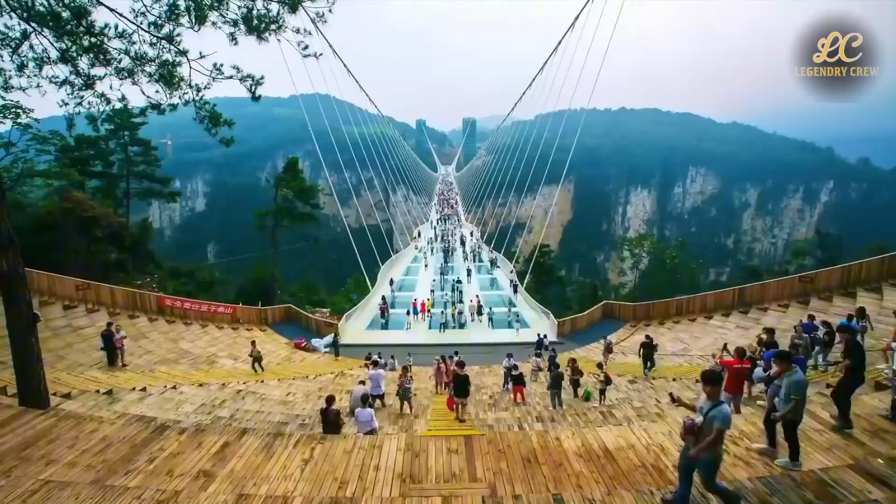Crews reportedly progressed at roughly 2 to 3 meters per day, sometimes less, with constant reinforcement and monitoring. More than 1,000 workers rotated through the site over years, not because the project was mismanaged, but because physics does not negotiate. This matters because it breaks the spell that viral megaproject videos rely on.

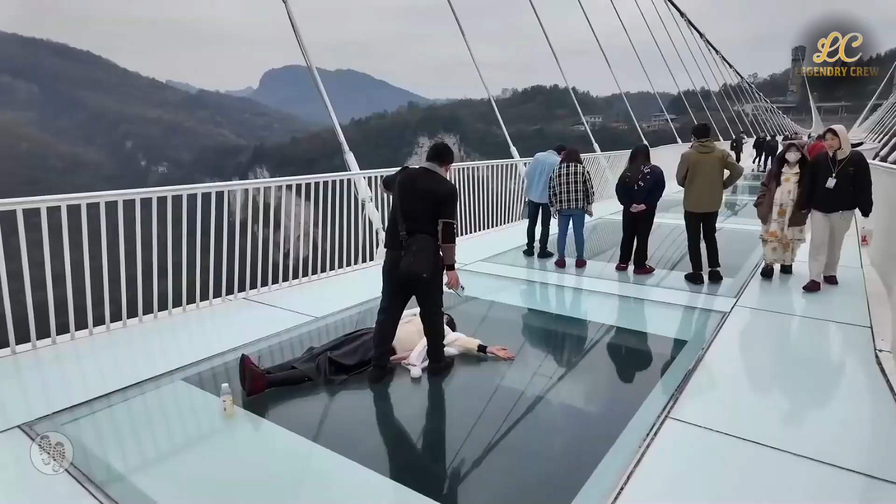China is not fast because it ignores reality. It is fast when reality allows it, and stubborn when it does not. The same system that replaced a bridge in 43 hours accepted a 6-year slog for a tunnel shorter than 2 football fields. That contradiction is not a weakness, it is the point.

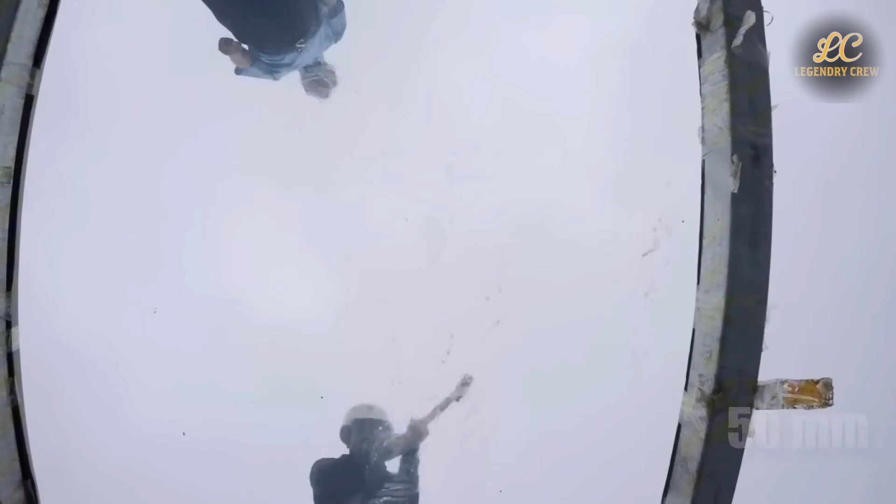For American viewers, this should feel familiar. The United States also has projects that move quickly when conditions align and stall when geology, weather, or legal constraints intervene. The difference is not that China defies limits while America respects them.

The difference is how each country frames success. China showcases speed when speed is possible. America fixates on process, even when speed would be rational.

Seen together, all 7 cases tell a more balanced story than the original shock narrative. China's megaprojects succeed because of scale, standardization, centralized authority, and a willingness to front-load cost and risk. They also generate debt, environmental strain, and long-term obligations that are easy to minimize in a highlight reel and hard to manage over decades.

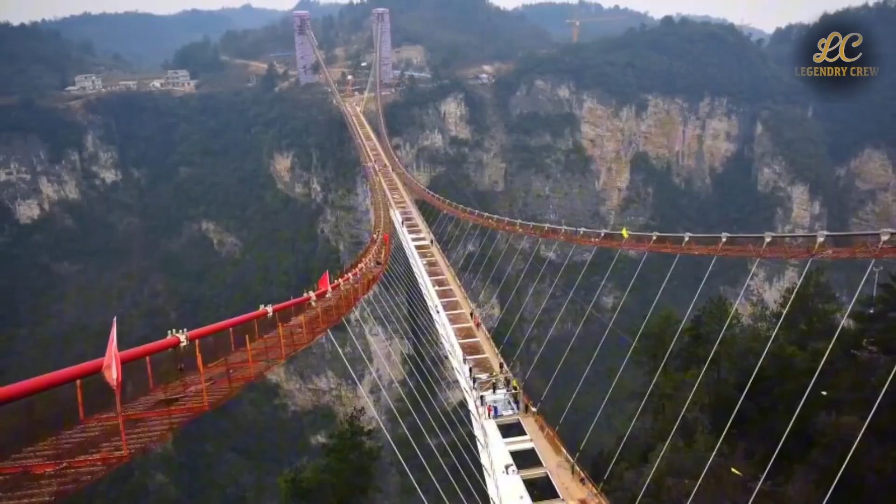The United States, by contrast, disperses risk through procedure, local consent, and litigation. That reduces certain failures and amplifies others. It trades spectacle for resilience, and then wonders why it looks slow on camera.

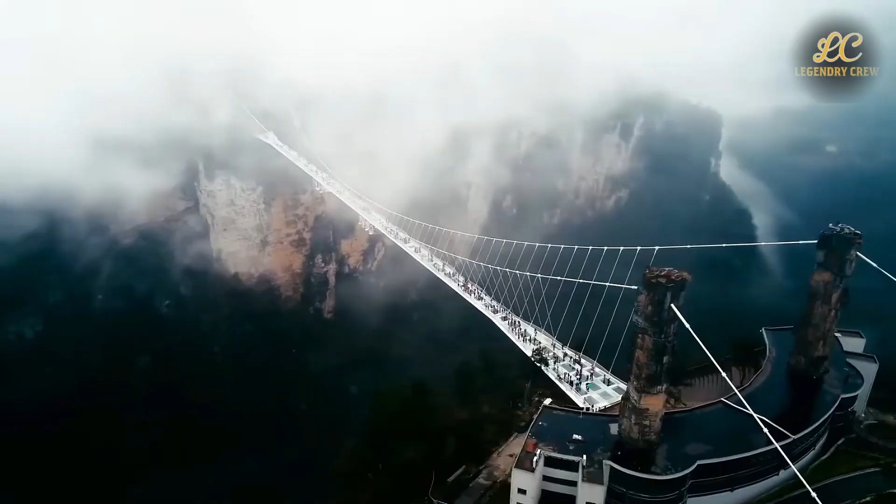The uncomfortable truth for American audiences is that neither system is broken. They are optimized for different fears. China fears stagnation and lost momentum, so it builds aggressively and deals with consequences later. The United States fears irreversible mistakes, so it delays decisions and pays quietly for inaction. Engineers understand both instincts. Politics decides which one wins.

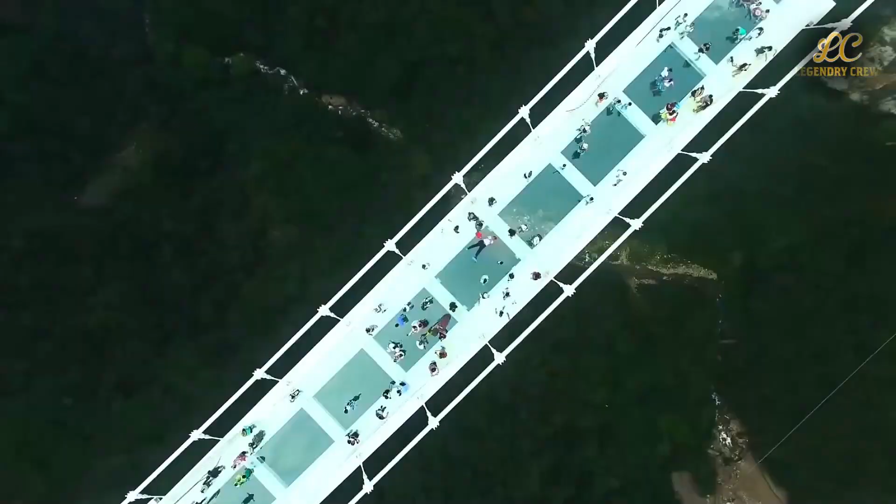So if American engineers are shocked by China's projects, it is not because they do not understand the math. It is because they recognize a mirror held at an angle. The question is not whether America should build like China. It is whether America is honest about what it is willing to trade for speed, and what it is already trading away by refusing to choose.